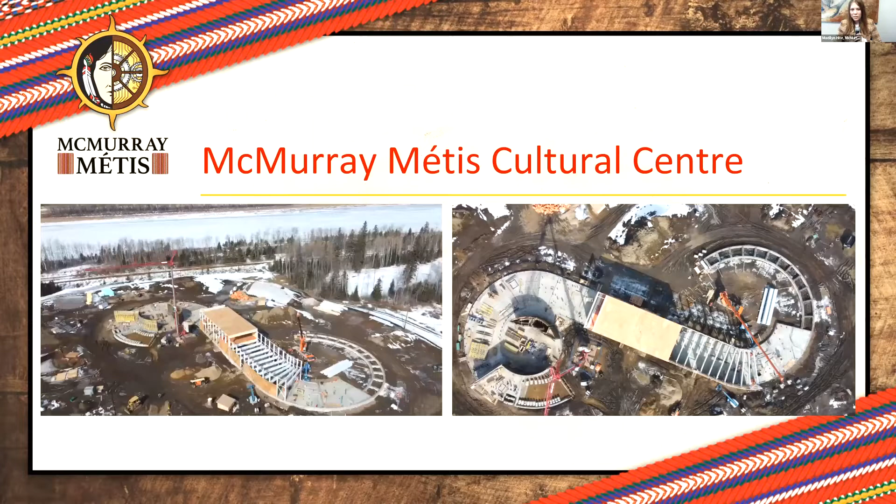We have over 20 employees and we've outgrown those trailers. We do not fit, people are squeezing into offices, it's getting really tight here, and we have over 860 members. On those slides, you can see we've already started construction, and it's popped up a lot within the past 2 months. We started, I believe, 6, 7, 8 months ago. I've been here through the thick of it.

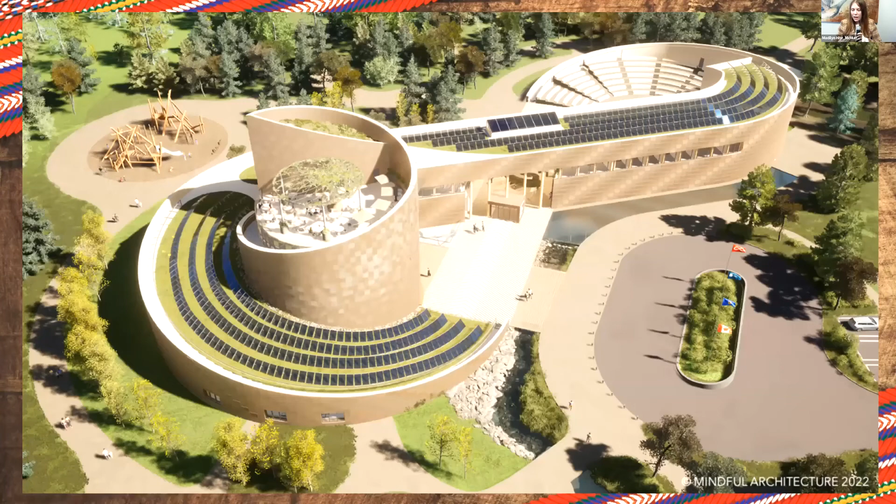I've been a member for 6 years, and most importantly, I've been a summer student with them. The different kinds of activities we're hoping to have in this beautiful cultural center range from beading networks with our elders, youth and members, to jigging in our multi-purpose rooms, to learning how to cook bannock and traditional meals in the kitchen, and displaying Indigenous movies.

I went to school for film and TV production, and I'm really excited for the theater that's going to be in there, the outdoor amphitheater, the park. It's going to be a place for our members and the community. This is not just a building for Métis people to go in and out of, this is for everyone. It's going to be a tourism destination for people to come in and learn about Métis culture.

What we always say at McMurray Métis is that our future is the youth, so we're trying to help build a future for the next generation. I personally was put through college through McMurray Métis's bursary program. I had a job to come to in the summer that focused on film and TV production, I made videos for them. Then after college, to be able to work on a project like this, I am sourcing all the TVs, the projectors, the speakers, the conferencing units that are going into this project. I am so lucky to be working on this as a youth.

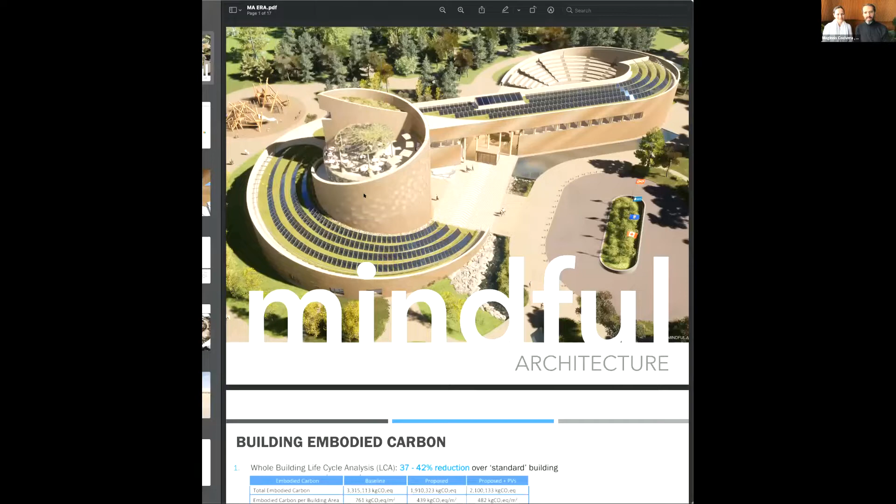I'm Magnus Cochrane, architect and principal at Mindful Architecture. And I'm Genevieve Noel, principal and designer at Mindful Architecture. We're the architects for the McMurray Métis Cultural Center.

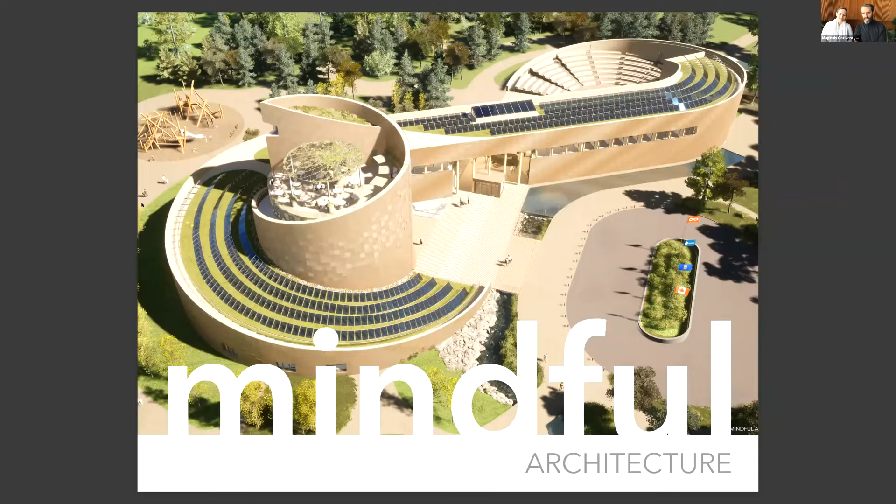We were given a brief that this was to be a deeply sustainable building. What does that mean? I guess it means different things to different people. Our approach was to say, what is the main problem we're trying to solve? And that is climate change. Since we're in the midst of a carbon crisis, we wanted to look at all aspects of the building in terms of carbon.

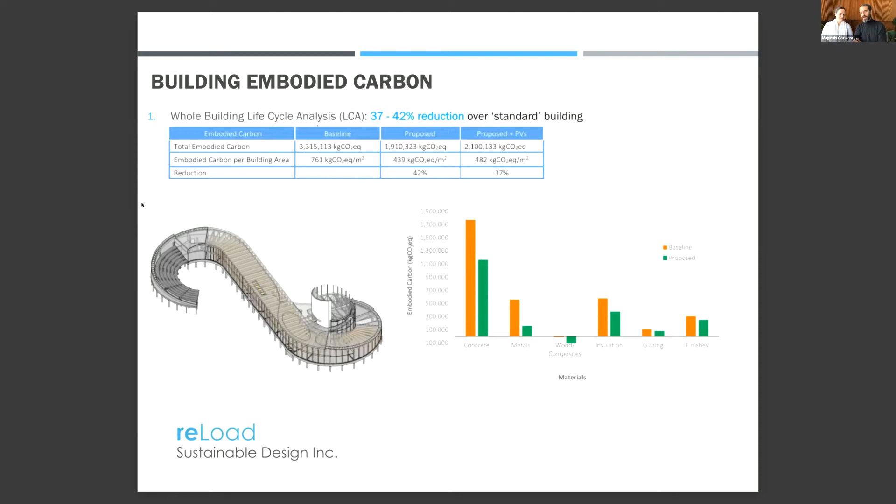We have an absolutely spectacular team, including Reload Sustainable Design, ARC Engineers, AME Engineering, and SMP Engineering, as well as Miskamin Engineering for structural solutions. Working with our team, we looked at how we can sequester the maximum amount of carbon within the structure of the building itself.

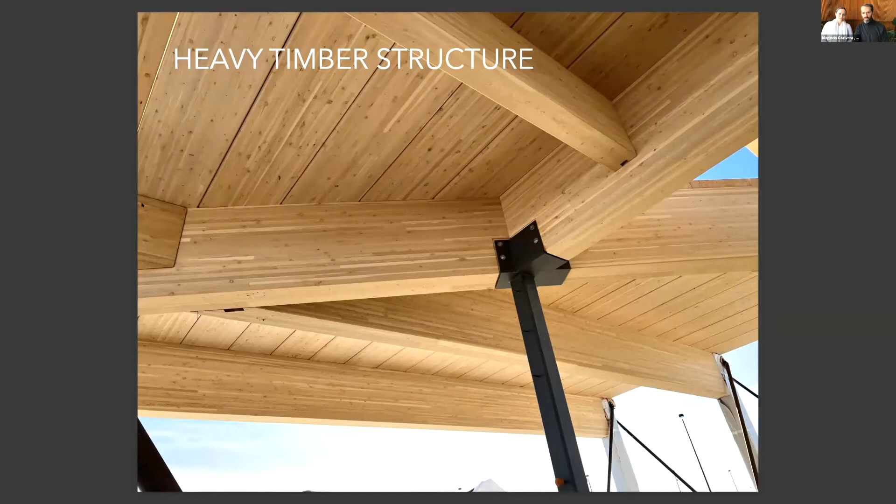That really recommended an approach to use heavy timber, so glulams and solid wood floors, but also, because concrete is kind of a necessary evil when you're building, there's really not another great way to do a foundation for a large building like this that doesn't involve concrete. So we're employing a technology called CarbonCure, a Canadian company out of Nova Scotia, that injects carbon dioxide into concrete to mineralize and form CaCO3, calcium carbonate. The emissions are actually harvested from industrial processes, so they're sequestering carbon that would otherwise be released into the atmosphere.

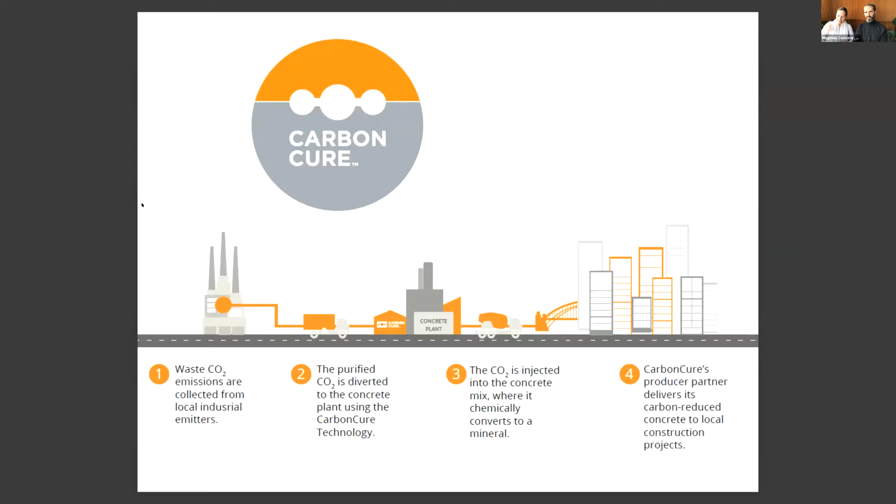The form of the building is based on the infinity loop, because the McMurray Métis brief called for a building and a monument, and the infinity loop is the symbol of the Métis people. So we thought we would make the building the monument itself, so you can see it from Google Earth and know that this is Métis land just by looking down.

The challenge, of course, is how do we make the building rational and logical for green building. You can see there's a long straight section which contains most of the program, with a relatively thin floor plate, about 13 meters, meaning light and air can come in from both sides and reach right into the middle. The long section is also oriented east-west, so the long axis faces due south for maximum solar gain.

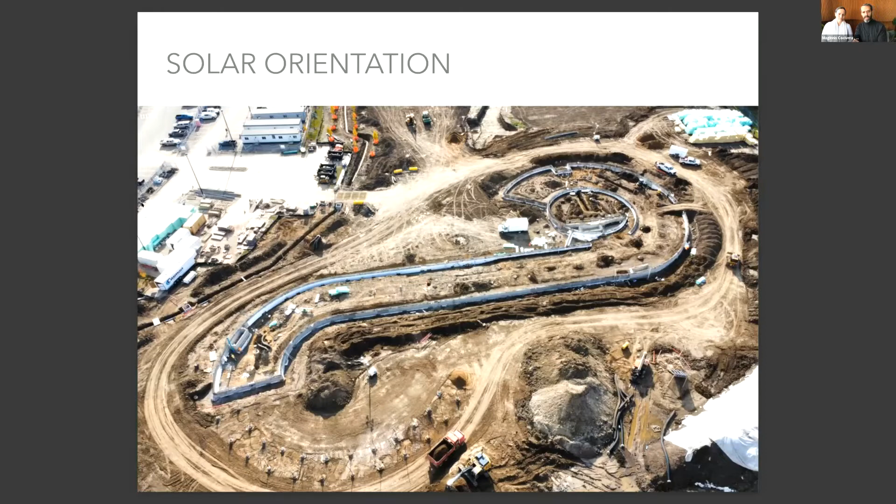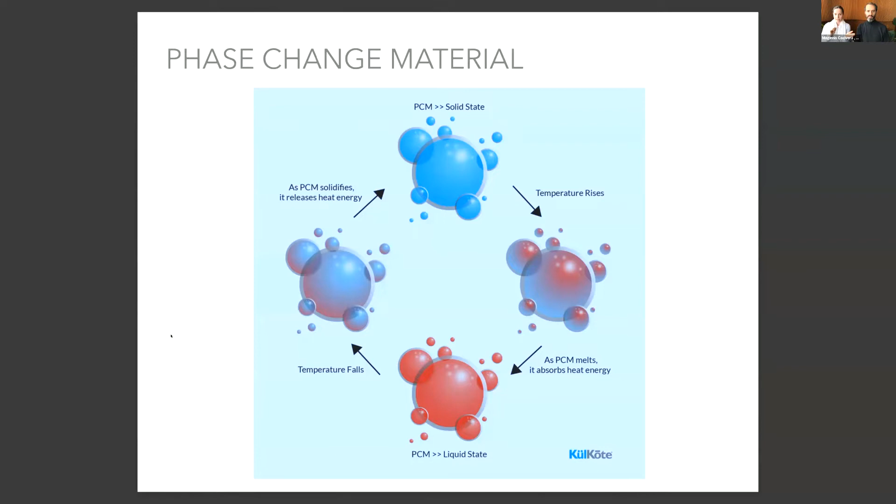At the entrance on the south facade and eastern area, we have two large glazed entries meant to be sun catchers. Within these cavities, where the sun penetrates into the building, we have phase change material, which changes from solid to liquid back to solid, seeking to maintain a consistent temperature. It harvests heat during the day, the excess heat liquefies the material, and in the evening, after the sun goes down, the heat is released within the building. So we have east-facing and south-facing glazing to catch that heat and harvest it into the building.

Crucial, of course, to any attempt at sustainability is to reduce demand. I won't get into all the different measures, but we've looked through the entire building with our team and come up with a whole bunch of measures to reduce energy demand. Per the energy analysis done by Reload Sustainable, we're using 55% less energy than a 2017 code compliant building, excluding renewables, so we'll be even lower with the renewables factored in.

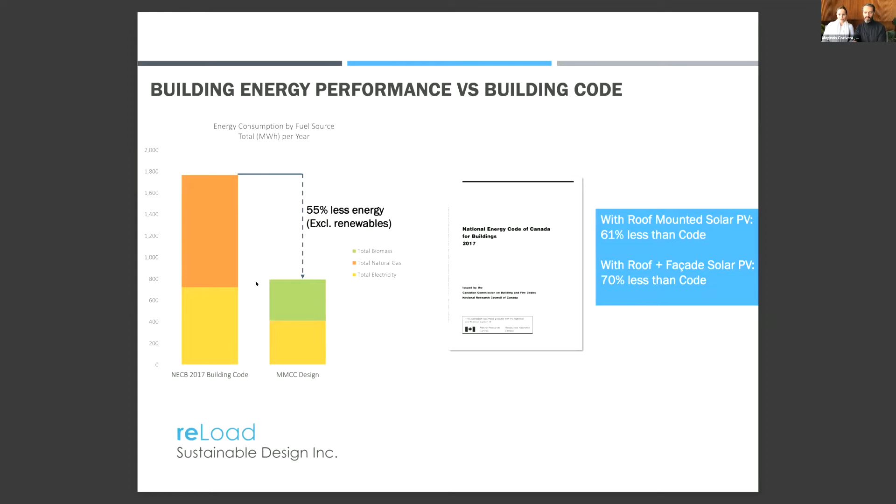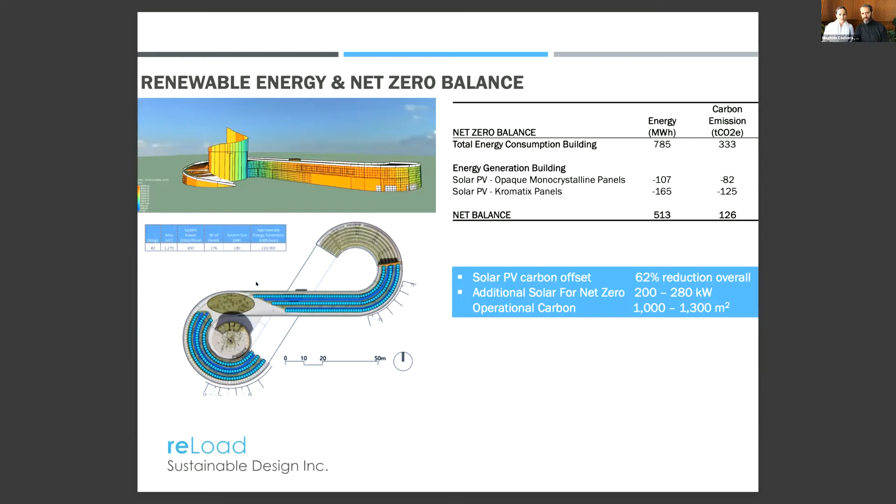One of the main strategies was to eliminate fossil fuel burning from the building itself, so there's a biomass boiler instead of a gas boiler. But the challenge is the bulk of the systems run on electricity, and much of the grid in Alberta is powered by coal-fired and gas-fired power plants, so there's still a fair amount of carbon emissions to offset, which is why there's such a large photovoltaic array. Because we're at a northern latitude, it makes sense to have vertical photovoltaics, so the cladding of the building is actually producing energy. There's both rack-mounted panels on the roof as well as vertical ones, so that patterned facade you see is actually photovoltaic panels.

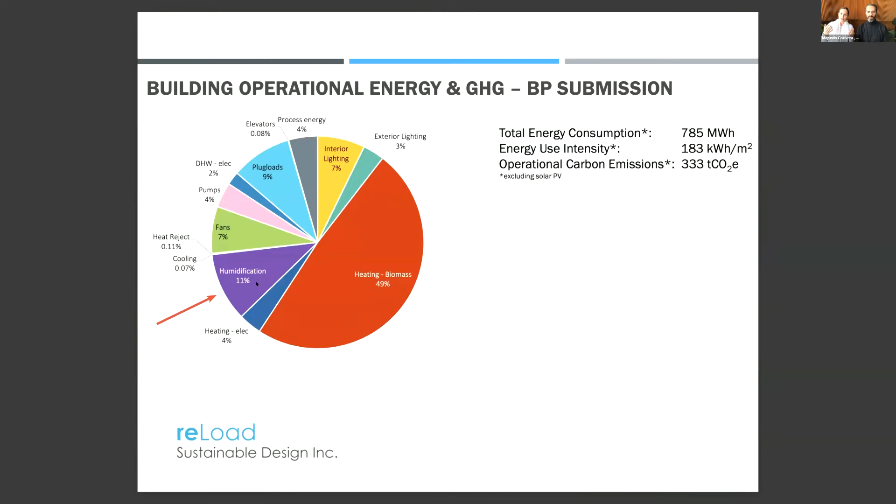Looking at the operational energy requirement of the building, we were really interested to look at how humidification is 11% of the energy demand for the ongoing performance of the building. So we were thinking of how we can lower that demand on a mechanical system in a natural way that is actually enhancing the well-being and comfort of the building.

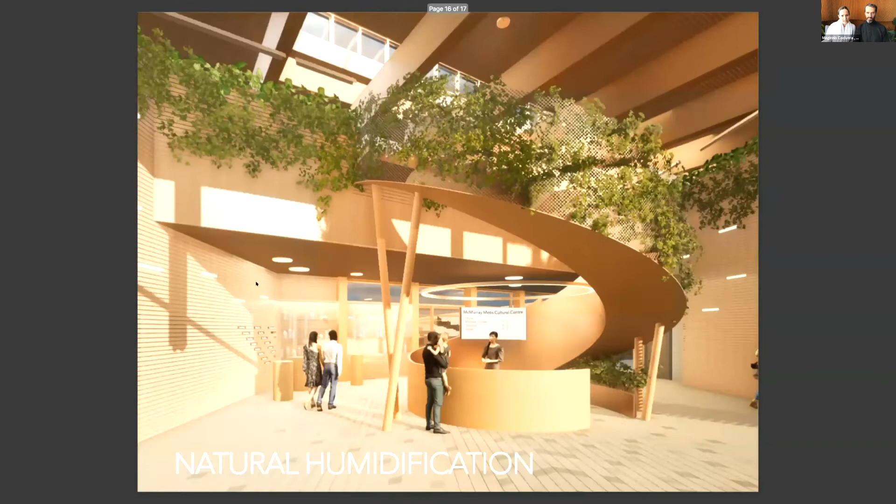We're integrating a lot of plantings in the atrium with an automatic irrigation system, and we can play with the lights and the irrigation to adjust the humidification of the building, which lowers the pressure on mechanical systems.

This is a picture of the co-working space at the higher level of the atrium, so there's a lot of plant selection. Right now we're calculating the humidification requirements, adjusting the plant quantities and specifications to seasonally adapt to the requirements of moisture in the air.

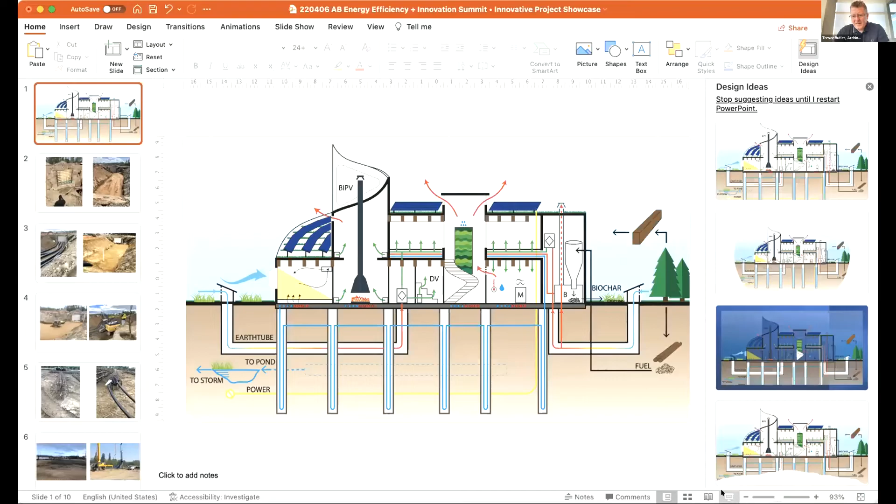Thank you very much, hopefully everybody can see this screen. I just want to say that it's really an honor to be working with McMurray Métis and the rest of the team. We've found the whole experience educational and incredibly collaborative in seeking to develop a solution together that really meets the needs of McMurray Métis, and we're very thankful to have this small part of the team.

One thing we learned was to think about the whole systems approach when we look at the building, and this is to do with starting with nature - the air, the water, the earth, and the plants - and how all of these can work together as part of the overall systems to make the building work.

When we look back in history, we see that a lot of natural systems really are used to inform how buildings operate, especially cultural buildings through the history of the Métis, and learning from the land. That was one of the things that really came out to us in the early stages of the project - how we could bring everything together and learn from the land and use that as part of our approach. So this is a level 1 diagram.

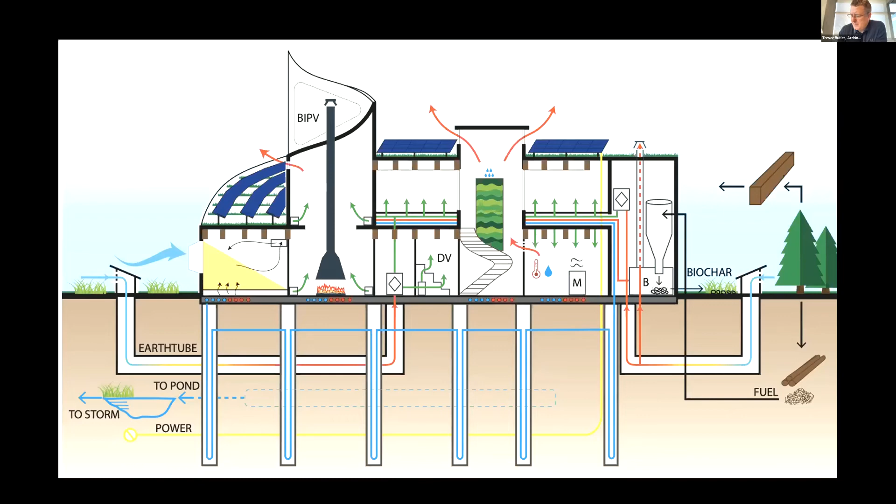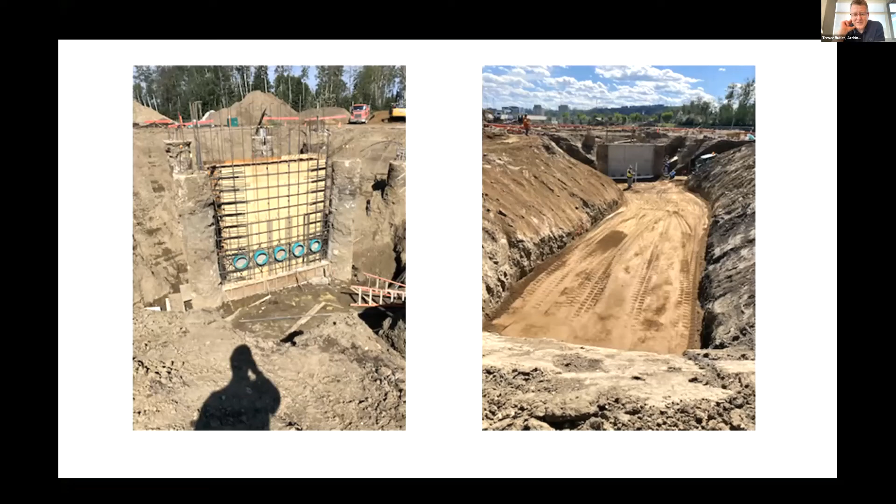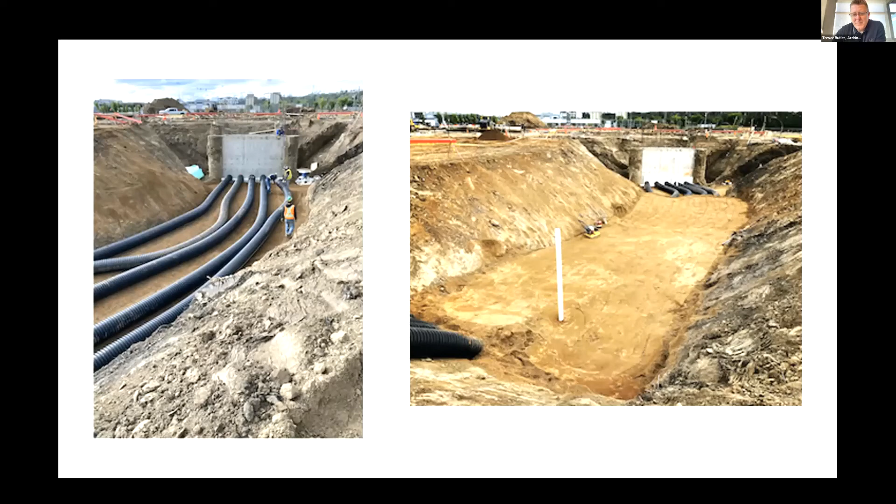You'll see this is the first one, which comes from the north, and there you can see the pipes being installed on the left, then backfilled and packed. Working with the geotech team was really important here - they gave a lot of guidance on how we should backfill the pipes. Then the structural group with McMurray engineers formed that chamber, making it part of the foundations. It was a very simple exercise, and working with Paul and Andrew and their team was very, very helpful.

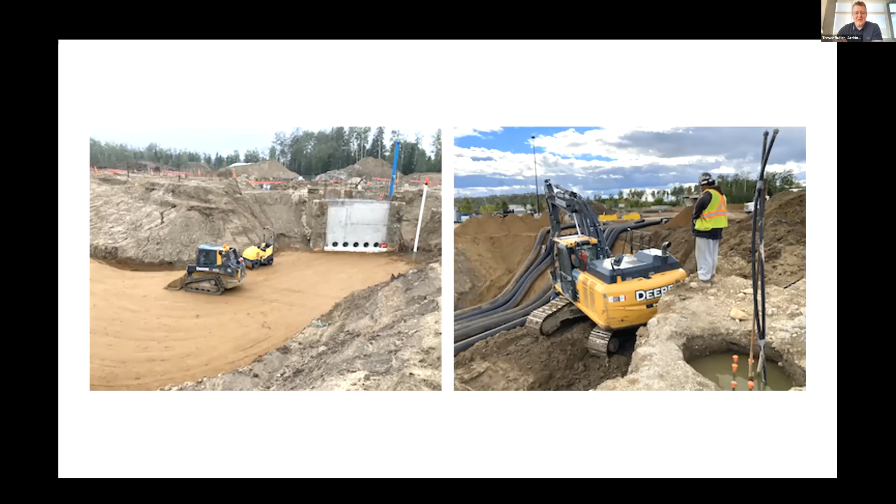Then you can see here the other array, which again has 5 pipes for ventilation, but there's 2 extra pipes that come up on this one for the building's biomass boilers. The biomass boilers need combustion air all winter to make the combustion operate effectively, and that's where these pipes come in.

The geopiles are basically inserted into the rebar cages as part of the piling contract. The piles themselves are drilled in the ground, the rebar goes in, and then you pour concrete. But before you do that, you just insert some tubing into the cages and then lower those in with the tubes.

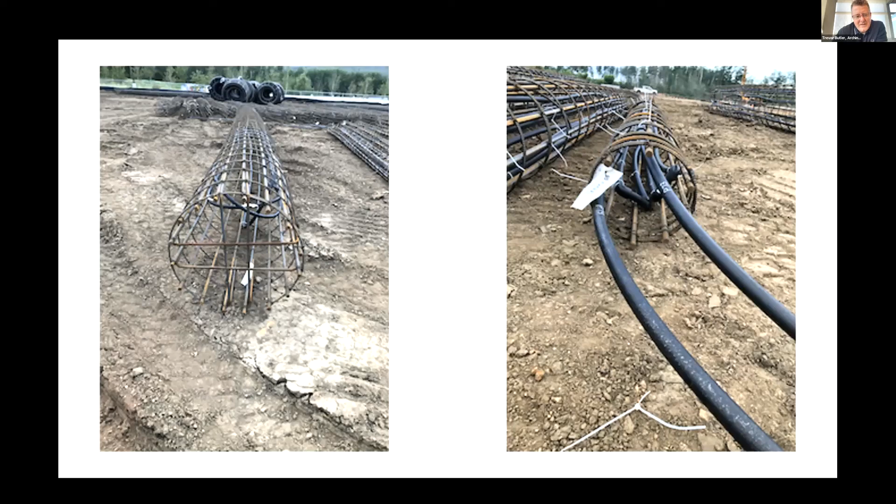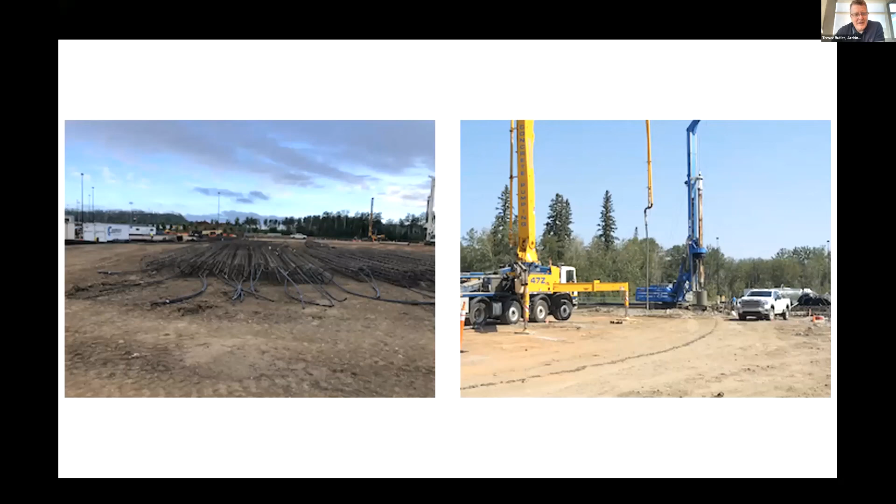The subcontracting team here working with Casman was Geotility, a geo-exchange subcontractor. They do design build work and managed the geopile installation, working in tandem with the piling contractor. Here are the various rebar cages with the tubes in, and on the right, there's the pile being drilled. There's the concrete truck with the CarbonCure concrete going in. On the left, you can see the rebar cage with the crane in the middle, holding the whole cage up with the tubes in it. That gets lowered into the hole, and there's the concrete truck waiting to pour the concrete in and surround them as part of the foundations.

Trevor, maybe just one more minute, and then we can get to some of the questions we have, if that works for you. That's good.

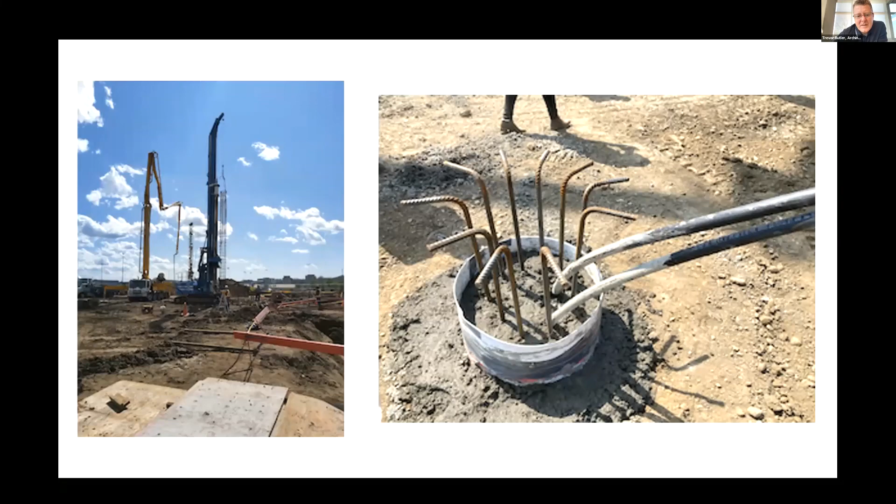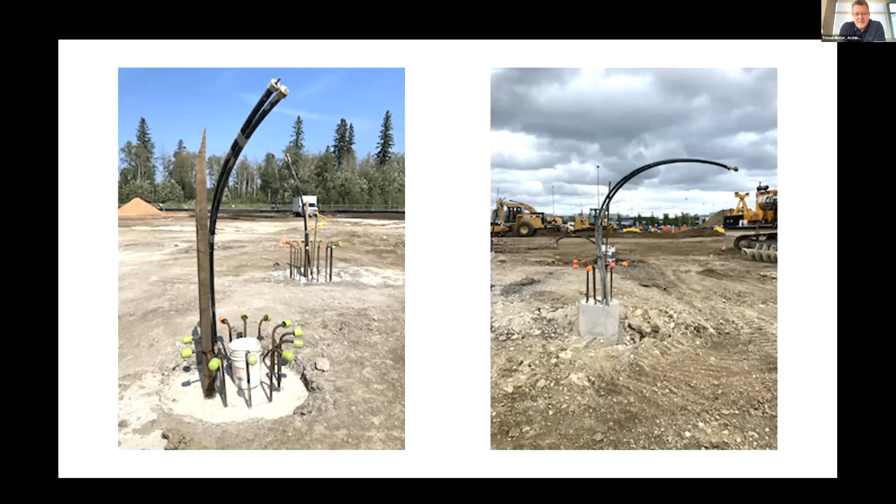Just wrapping up - this is a freshly made geopile on the right there. You can see the tubes coming out, and those are what connects to the building's cooling system. There is an option to provide heating through this as a geo-exchange in the future, but for now it's just providing passive cooling. There are about 120 of these piles throughout the project, and we think we're going to get about 50 to 60 tons of cooling, which meets the air conditioning load.